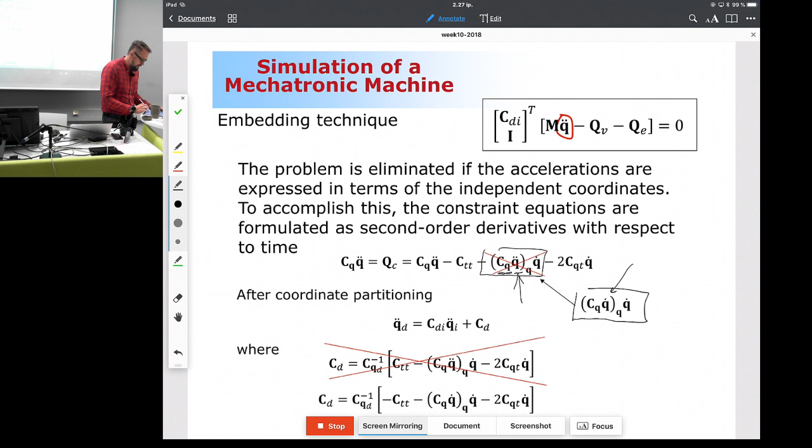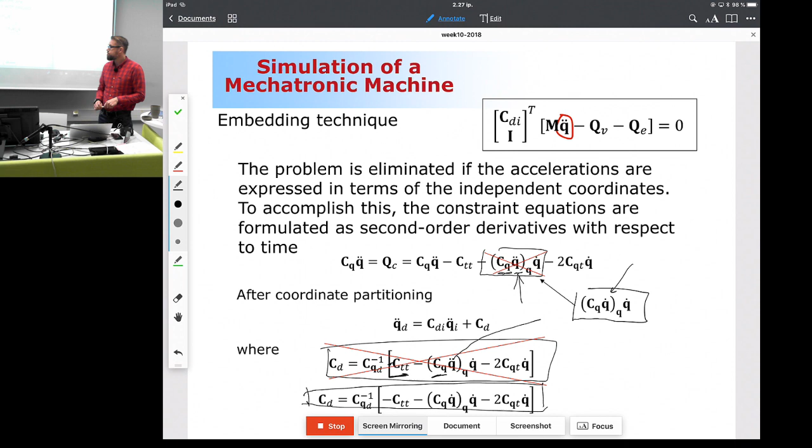There was another problem in my slide related to matrix CD, because there are two typing mistakes. First, there's supposed to be a minus sign before the vector that is differentiated twice with respect to time. Second, the Jacobian matrix should be multiplied by velocity, not acceleration. So the correct typing is the one shown here. That happened two weeks back.

Now a quite extensive summary of what we discussed last week. The first thing I didn't mention was that in hydraulic modeling we use drawing symbols. If you're uncomfortable or unfamiliar with the drawing symbols, you need to look this up yourself online, on web pages that explain what the drawing symbols stand for, because in reality this is how the hydraulic circuit looks. We won't use three-dimensional drawings to explain the hydraulic circuit, but instead use drawing symbols. We will not explain what the symbols stand for in this class, so you need to catch up on that by yourself.

As an example, in reality we have an electrical motor that looks like this, and the drawing symbol associated with it is just a simple motor shape. Then we have a pump, described by this drawing symbol. We also have a pressure direction valve, shown by this symbol, and the check valves here, which look like this and this. Finally, this is the pressure relief valve that takes the flow back to the tank. That's how we describe the hydraulic circuit.

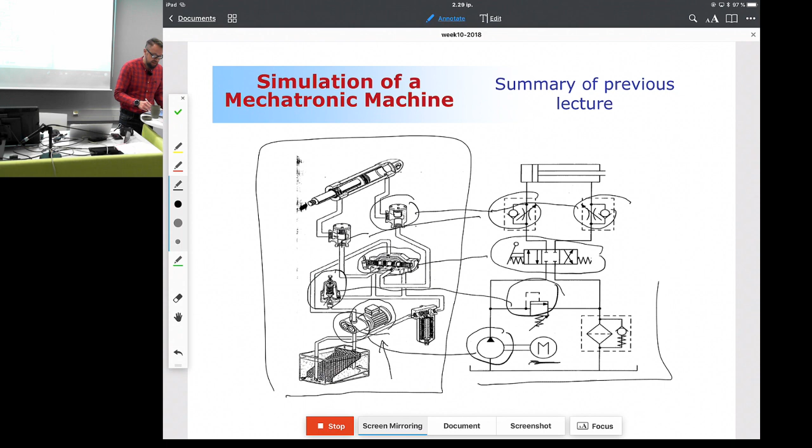Last week we discussed the properties of liquids and concluded that the most important property for us is the bulk modulus. There is a 99.99% certainty you'll find a question related to bulk modulus in the next midterm exam, which is within a few weeks, so I will ask something related to it. The bulk modulus describes the flexibility of fluid, and this week's homework is related to the flexibility of fluid. We'll get back to that in the next slide or so.

How do we describe this flexibility? It consists of a number of components: the flexibility of the oil, the flexibility of container number one, the flexibility of container number two, and the flexibility due to dissolved air. You keep adding these components, and all of them affect how stiff or rigid the hydraulics are. That's something you need in a hydraulic model.

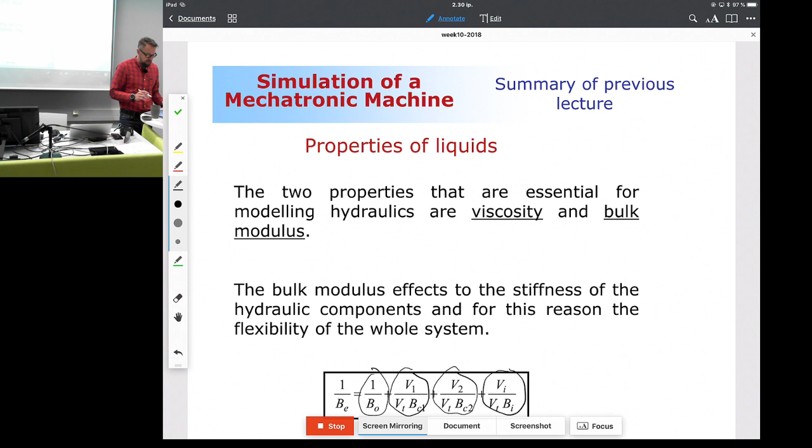This week's homework has a simple assignment where I'm asking you to calculate the natural frequency associated with a crane, a simple crane operated by hydraulics with a hydraulic cylinder and a mass, due to the flexibility of the hydraulics. What will be the natural frequency of this system? You can compute natural frequency if you know the stiffness and the mass.

One important thing: if the mass is located at the free end of the simple crane, you have to convert the mass to be applied at a different point. The numbers were provided so it was quite straightforward—if I remember correctly, this length was 0.1 and this length was 1. So the mass applying at the end of the crane equals the original mass multiplied by 10, where the 10 comes from these lengths: 1 divided by 0.1 equals 10.

But what about the spring coefficient? How do you compute that? This is what I believe I skipped in last week's lecture—did I not? I skipped it.

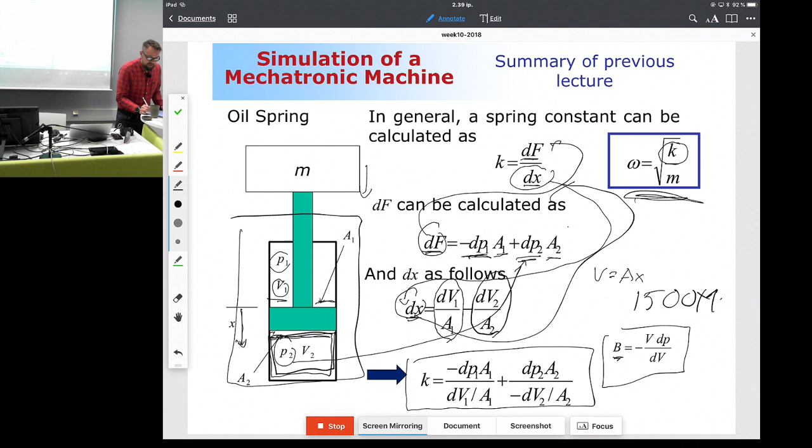Either way, you can get full points. If you're using values from the internet, the recommendation is to use something in this neighborhood, 1,000 to 1,500 megapascal, roughly in that neighborhood. That will be all right. It's actually, in reality, a little lower than that, because if there's a hose or some other soft component connected to the hydraulic cylinder, that will lower the effective bulk modulus.

Okay, there's a problem with the mic right now, there's an echo or something. That was a comment from online participants. So let's see, it's a problem with the mic. So whoever provided that comment, there were two different persons.

So can we just wait a few minutes and see if it's any better? It's supposed to be significantly better now. So online participants, please type how it is, do you hear me well, or are you still suffering from echo? Now it's even worse, it's really bad right now. No echo.

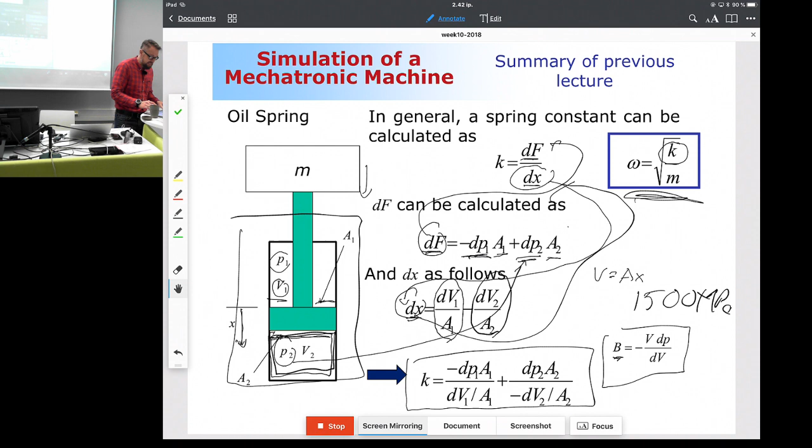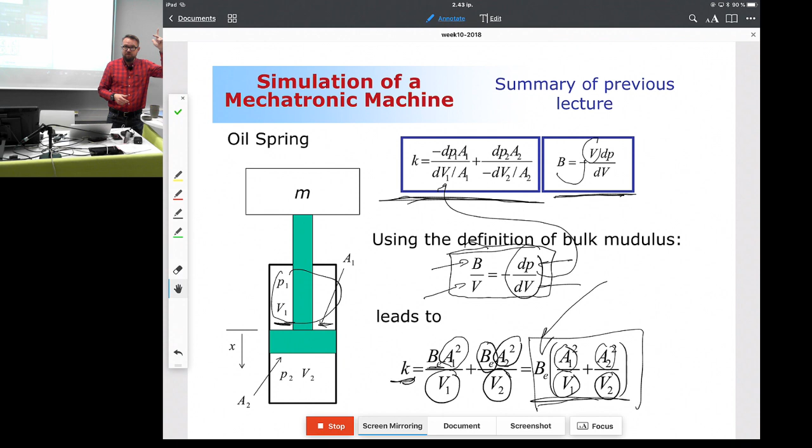Okay, but now we're here. Oh my God, is this late already? So remember the deal we made last week, that if I'm not making excessive explanations, you need to raise your hand and say okay, that's it, we've heard these stories many times, move on please. So can you please raise your hand, or maybe we can make another sign, so if you raise your left hand with this sign, that means okay, speed up please. Okay, clear? Got it. Okay, so I'm gonna speed up.

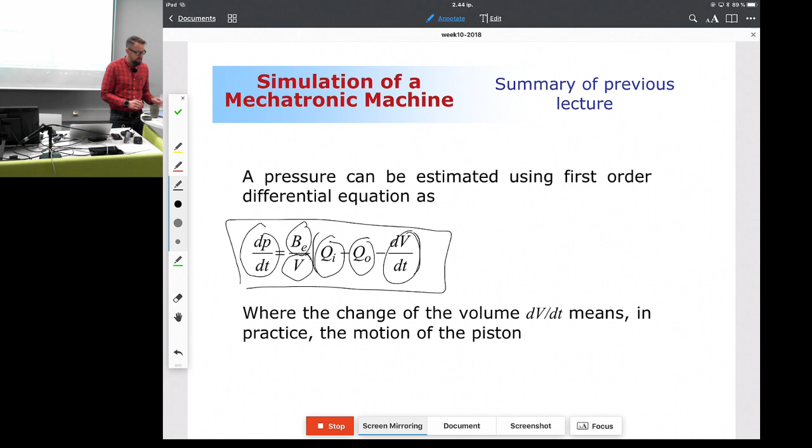In this method, what we're going to do is simply discretize the hydraulic circuit within the volumes, where we are assuming pressure to be equally distributed. So if we have a damper like this, we can assume that the pressure in the upper right corner will be the same as the pressure in the lower left corner, because there's nothing inside this particular volume that will introduce pressure losses.

But we cannot assume that the pressure in the upper part of the damper will be the same as the lower part of the damper, because there is something that will introduce pressure losses - the throttlings through the pistons. Those are the throttles where the flow has to travel back and forth, and typically they introduce a little bit of pressure loss. That's why we have to use two different volumes in order to figure out the pressure on this side and the pressure on this side. Once we know them, we can compute the corresponding force produced by this damper.

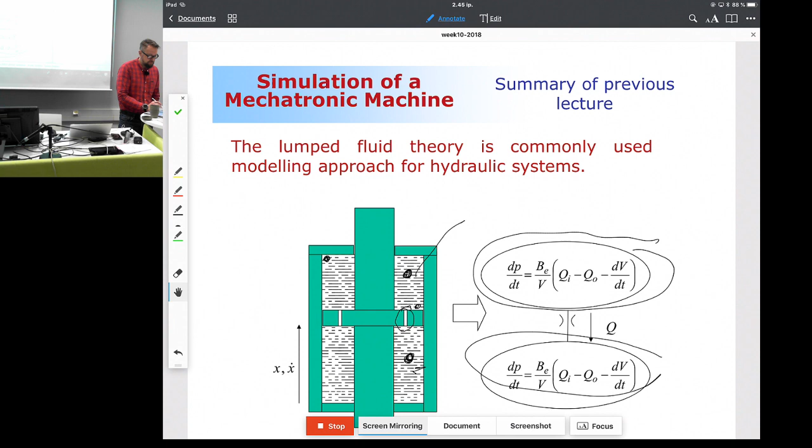Oh, that's a very unclear picture. I'm not even trying to explain it here because I cannot see this even by myself. So this is a symbol - what is this? Is this a horse or? I don't know, I don't even know what I have in my slide. Fish? What, fish.

Okay, so with that, we're ready to move on. I guess this is something you can find in my lecture notes. If not, I will make this clear to you - by the way, my slides are available as a PowerPoint, and it's going to be as a PDF on the Moodle site, so please take a look at that. I cannot explain what we have here just based on this particular slide.

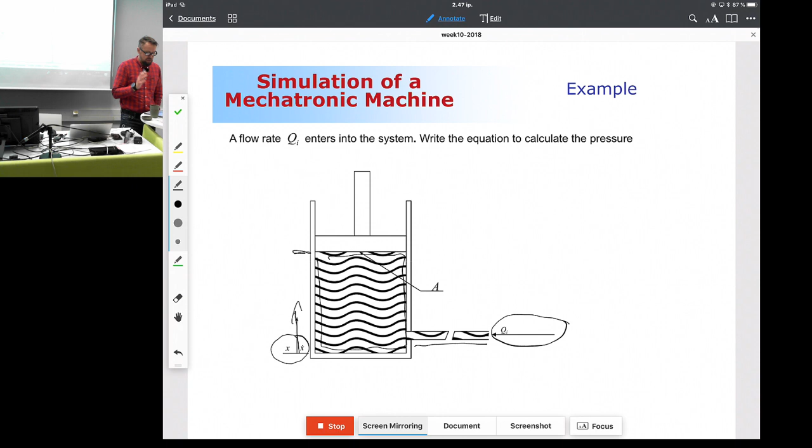One more thing - I have here an example of how to use this first order differential equation. In my example, I have a one-way cylinder, and in this cylinder I have a volume of this size. This cylinder is connected to a hose, and there's a flow rate coming into this system. I'm asking you to create the first order differential equation based on this information. We are measuring the distance of the piston using X, and X is measured from the bottom of the cylinder to wherever the piston is located. Now I'm going to use this information to create the first order differential equation.

So the ingredients that I need are, first of all, the volume, and the volume consists of two components.

Okay guys, you all clear? Yeah. So are you already planning what to do on Friday, or not at all? Something in hydraulics, yeah. Well good, very happy to hear that.

Okay, so what I have here is a volume equation - I have the volume of the hose, and then the volume of the cylinder. Volume of the cylinder is a variable, it's going to change depending on the piston position. So to compute that, I need to measure X, and again X starts here and ends where the piston is located. That is multiplied by cross-section area, and that will be equal to the volume itself.

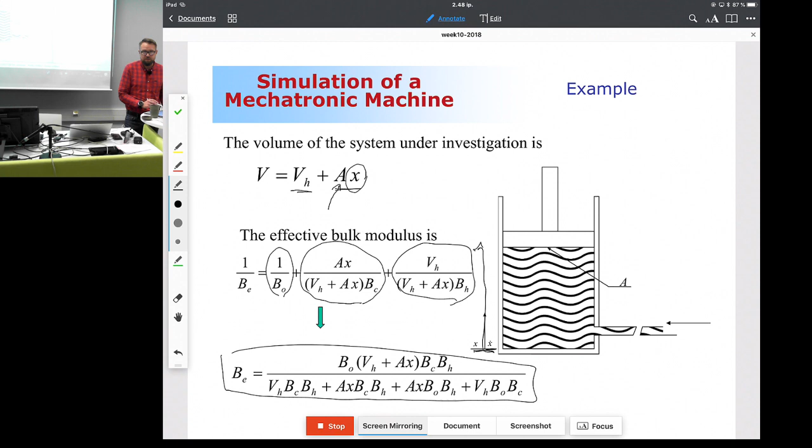Then the effective bulk modulus - the effective bulk modulus will have three components. The first associated to the oil itself, the second associated to the cylinder, and the third associated to the flexibility of the hose. With this information I can calculate the effective bulk modulus, so I'm using the symbolic math tool to express it, and here it is. I'm almost ready to move on to my differential equation.

The final thing I needed is the component describing the change of the volume itself - of course, that's going to be the cross-section of the piston multiplied by velocity, so that's what it is. Now, substituting the effective bulk modulus, that's going to be here, divided by volume size, it's going to be here, and the flow that is coming in.

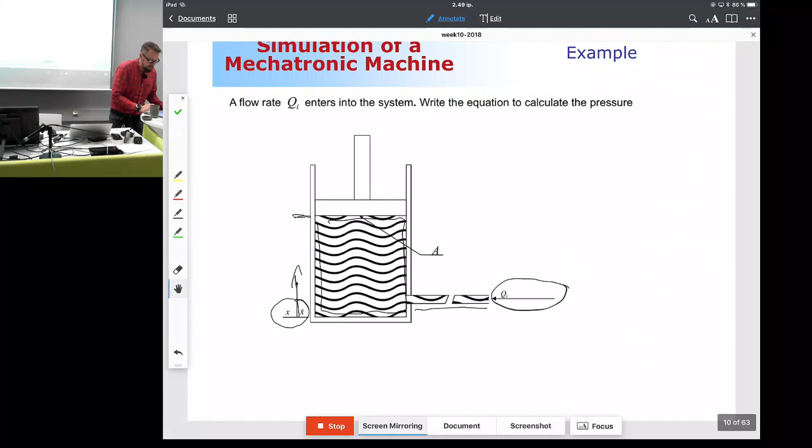Now, this is extremely important: whenever you're modeling the hydraulics, you have to make a schematic drawing which tells you what is the positive direction of the flow rate. I'm trying to show how you're first supposed to make a drawing about hydraulics. In this drawing, you're telling where the pressure is supposed to be computed, where the volumes are, where the pressure needs to be solved, and more importantly, what is the positive sign of the flow rate. You can make this however you want - that's not the point. But once you make your decision, you must be consistent, because this is a typical mistake you make when doing hydraulic modeling.

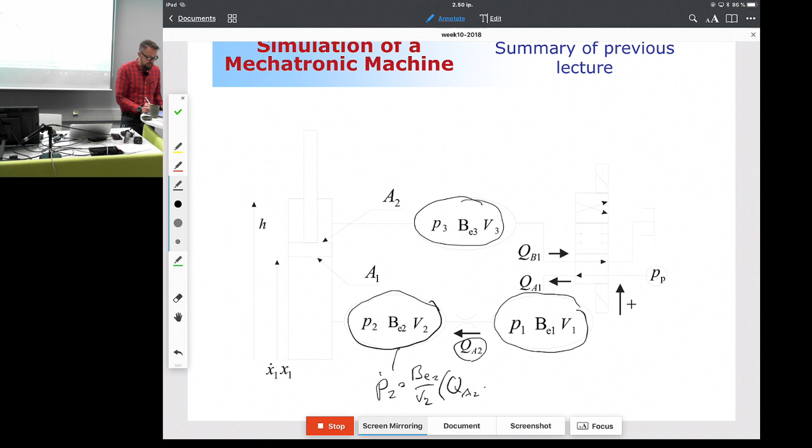So when you compute the pressure here, P2, it's effective bulk modulus 2 divided by volume size 2, and the flow rate here is coming into the system, so it must be positive inside. And then what is leaving is this one here, x2 multiplied by the corresponding cross-section area. But the sign is actually coming from the schematic drawing, and you can make these drawings however you want, but once you do it, you must be consistent after that.

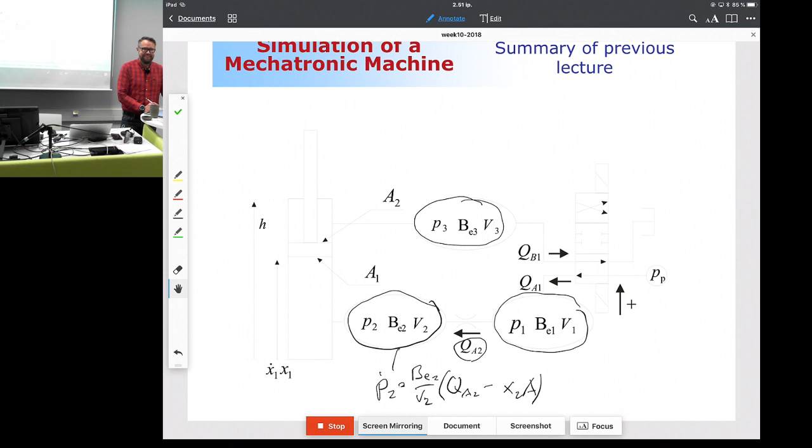Okay? Clear? Clear? This? No? Yes? Maybe? Okay? All right, very good.

So this is how it is. The final component here is the flow rate that is leaving - we don't actually have a flow rate leaving, but because of the piston motion, and the positive piston motion is in this direction, when the piston is moving that direction it's actually considered as a leaving flow rate. That's why this one here has a minus sign. All right, makes sense?

Well, none of this stuff makes any sense. Makes a little bit of sense. A little bit of sense. Makes complete sense. No comment? Yes? No? Maybe? What day is today? Okay, Wednesday. Wednesday? Yes, correct.

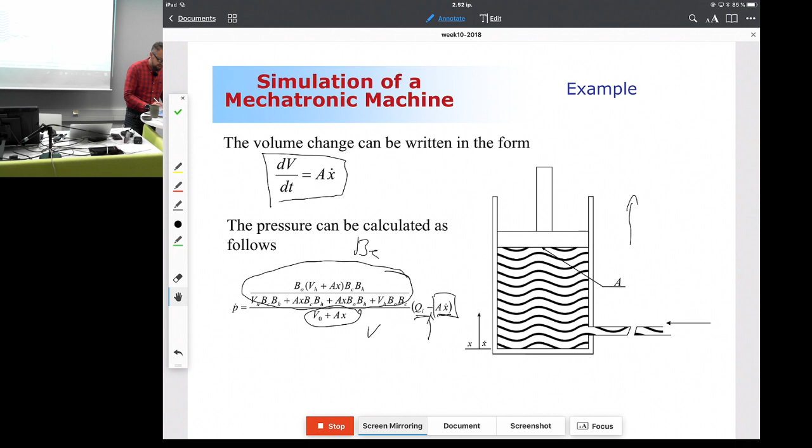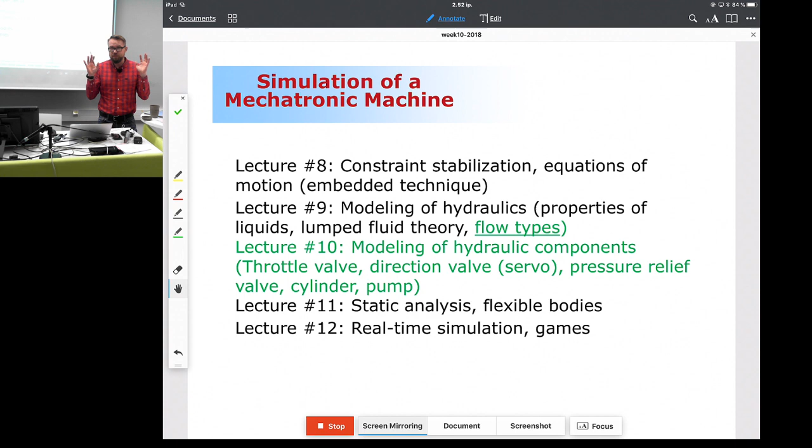That's correct, okay good. Now the flow types, and ready for the first in-class quiz. You can take a look at how the first in-class quiz is - it's already available in Socrative, and it will be related to Reynolds number, because I'm going to introduce you to two different flow types: either laminar flow or turbulent flow. So those are the two flow types, and the one that defines what flow type is in question is the Reynolds number. So he's already telling you the answer to today's in-class quiz. Just listen to me, we're going to be good, and we have a thin chance, but still a chance to score 100%.

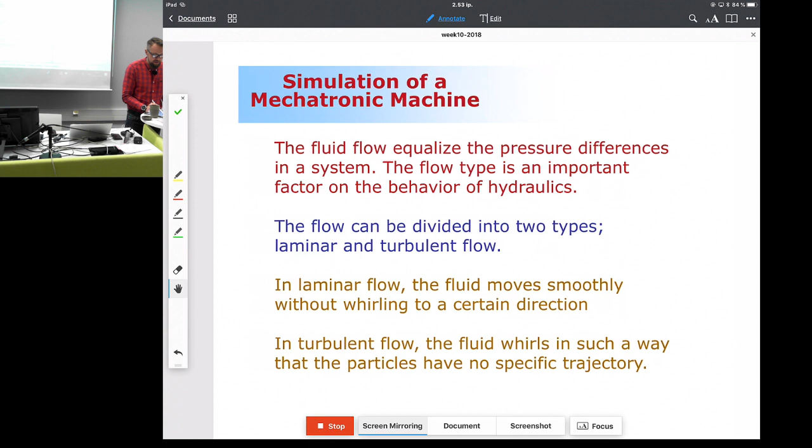Okay, now fluid flow tries to equalize pressure differences - that's the inherent nature of flow. So if there's a pressure difference, the flow is trying to equalize it. And then we have two different types of flow: either laminar or turbulent. Now the difference is this: if I have here a throttle, a pipeline or hose line, with P1 here and P2 here, and I'm assuming P1 is bigger than P2, meaning the flow is traveling this direction because it's trying to equalize the pressure difference.

In case of laminar flow, the particles of the fluid travel with good agreement, like this - there is no disagreement, so everything is smooth and nice. This is laminar flow. And in laminar flow, something important for us is to look at mathematically how the pressure difference relates to the flow rate. This is extremely important for us, very, very important.

Pressure difference, what's that? How do we calculate the pressure difference? That's going to be P1 minus P2. Maybe we should even take the absolute value here to make sure we never end up with a negative value, but that's the pressure difference. And then we have to relate the flow rate, traveling this direction, to the pressure difference. In case of laminar flow, they are linearly related.

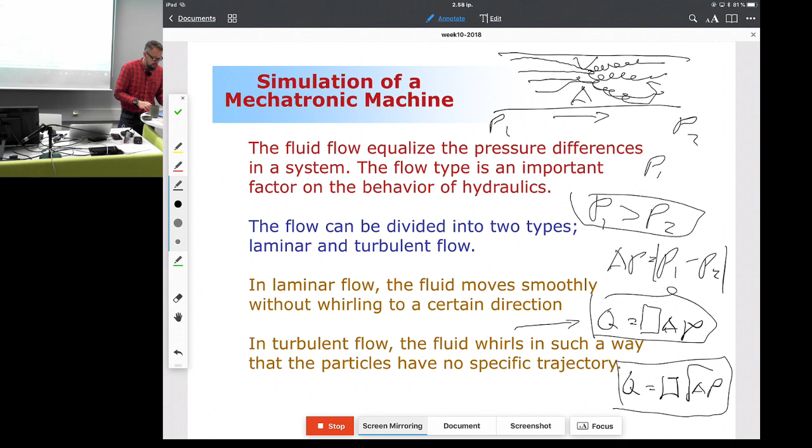But the one that defines which type of flow is in question can be defined by a Reynolds number. Reynolds number, that's the one that is very important for us. Now if you look at the in-class quiz, there's already a question related to that.

So take a look at the in-class quiz. Reynolds number defines the type of the flow - what type of flow is in question. That can be defined by computing the Reynolds number, and it will be compared against the critical Reynolds number. It's this simple: the flow is assumed to be laminar if the computed Reynolds number is less than the critical Reynolds number, and turbulent if it is more than the critical Reynolds number.

So the critical point, mathematically, the type of flow is defined by the Reynolds number, simple like that. How does it actually go? This is the mathematical definition for Reynolds number that you can compute. Now it's very difficult to see what is what, because what's the difference between this and that? One is kinematic viscosity, another one is velocity of flow.

And this is velocity - how can you tell? Because it looks all the same to me. I know, because I know this formula, but I must admit these notations are very unclear. So this is velocity, this is V D h over nu. This is V, velocity, and this is nu - kinematic viscosity. They look very much alike, but of course it's obvious once you know: this is velocity and this is nu, kinematic viscosity. That's the way you define what kind of flow rate is in question.

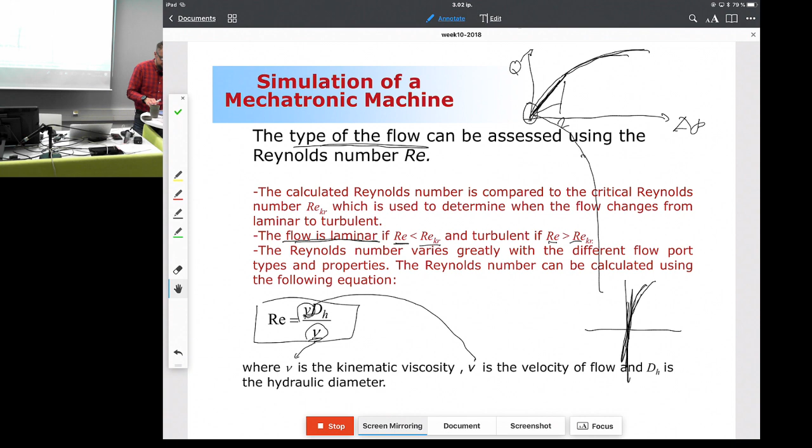All right, so the in-class quiz is this: Reynolds number defines compressibility of the hydraulic volume. We've discussed compressibility and models quite a bit. Is it related to that or not? Is it about the size of the hydraulic volume? Maybe when hydraulic volumes become small? Or is it about when the flow changes from laminar to turbulent?

Can you see how many online participants we have? On YouTube, 38. We're supposed to have more students than that because here we have roughly a little less than 100 students in class.

Plus the online participants, so we'll see. I know it's about time for a break, but because of the rocky road in the beginning, can we just make it a short break today? There's so much stuff we need to cover.

All right, so this in-class quiz is okay. So what is it, you ask? What is the success rate supposed to be? It should be 100, but it's not, because there are 4 obvious choices, so it's very difficult this time.

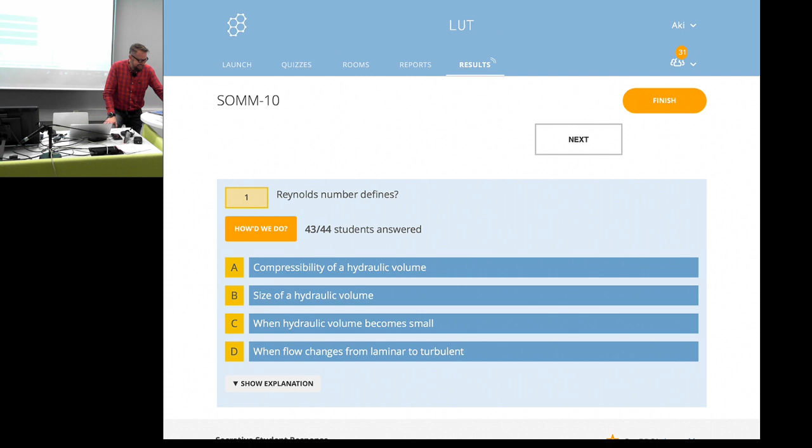So now you're not sure what to answer. Don't change it, please don't change it. Okay, are you all done? Maybe the online participants put the YouTube on and start following the recording. At some point the course becomes boring, so they check another website, then my streaming is somewhere in the background, and when the in-class quiz comes out, they're completely off with no understanding of the correct answer.

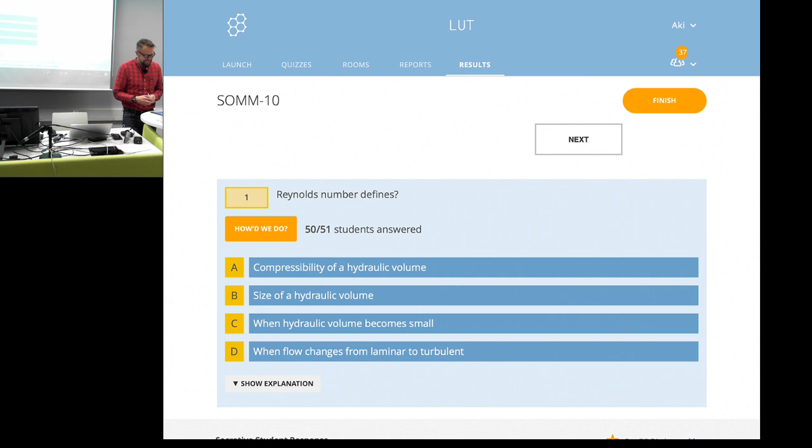But today, what will the success rate be? 95? Okay, the last ones are joining in. 97? Oh, there's more. 95? No, it's going to be 80, 88? That's my guess. Are you all done? Not yet. Okay, better not to answer yet. Please don't answer yet. Okay, well please answer, but make sure you consult your fellow student before entering your answer. So now it's just one. Can I click this?

Very good, very good. So it's defining when the flow changes from laminar to turbulent - that's what the Reynolds number is about. It's not about the size of the hydraulic volume.

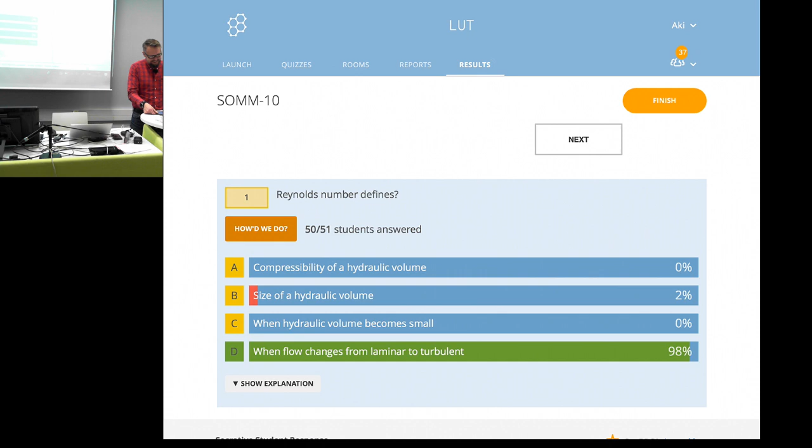There's this evil person who makes one answer. Don't know who that is. Maybe it's me, because otherwise it would all be correct. Maybe that one answer causes the 2%. No, that's not causing it. It's always counting the answers that are submitted - if not submitted, then it's not accounted for.

So what do you guys say, can we have a 5 minute break? And how is my YouTube officer? Is there any complaints about my voice? No further complaints about my voice. Okay, so it's good.

Okay, so 5 minute break, and then let's come back. Let's finalize the flow type, and then let's look at the different components. The first component will be the direction valve.

I don't understand this guy. Why is this not cooperating with me? I don't understand.